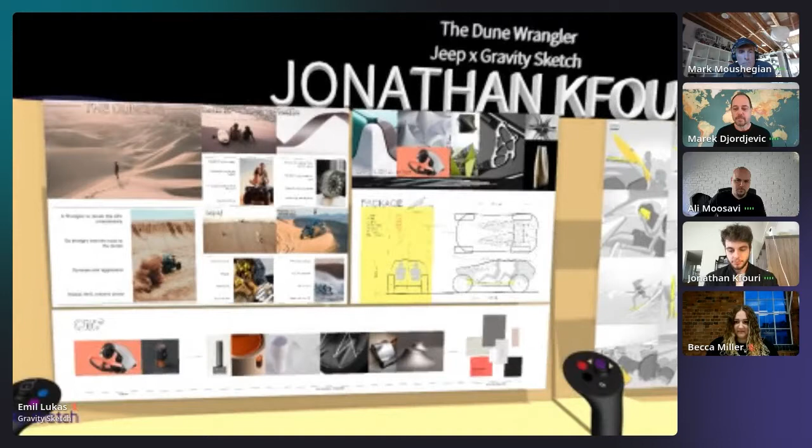One of the materials I've been looking at that's really become core to the project is Braeon, which is essentially a flexible material that's stronger than steel. In terms of my inspiration, I'm looking at inspiration that's both playful and geometric, as well as pure and dynamic, really trying to tie into the duality between both parts of the project.

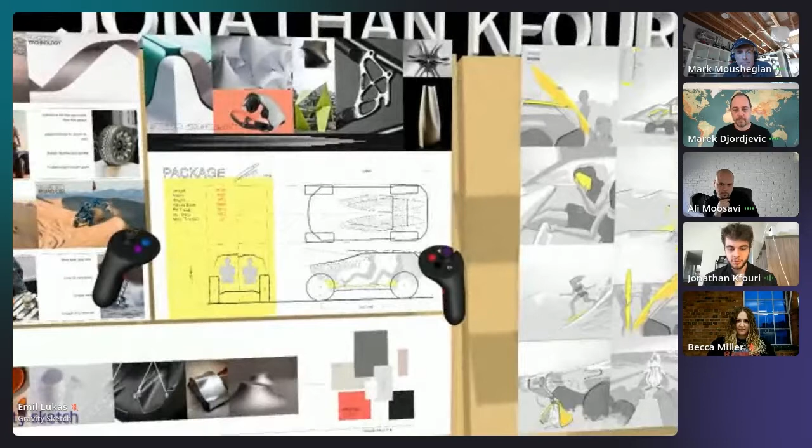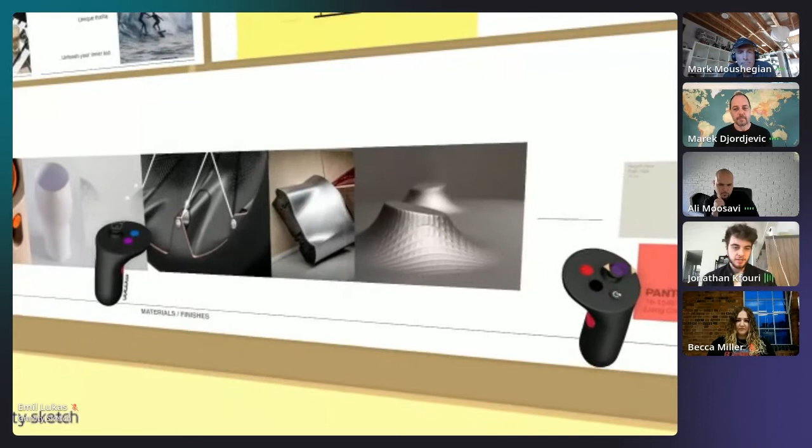For the package, I'm looking at having a low center of gravity, as well as a high polar moment to really make the car handle like a rally car, something perfect for the dunes. In terms of my CMF at the bottom, we have a tactile, more sensory feeling CMF—something that feels both rugged and sophisticated, but also approachable. I really don't want this to feel intimidating in any way.

Moving on to my storyboard, this is really just a day in the life of the user. Next to that, we have my animation rundown for the following animation that we'll see at the end of the project, not of this presentation, unfortunately.

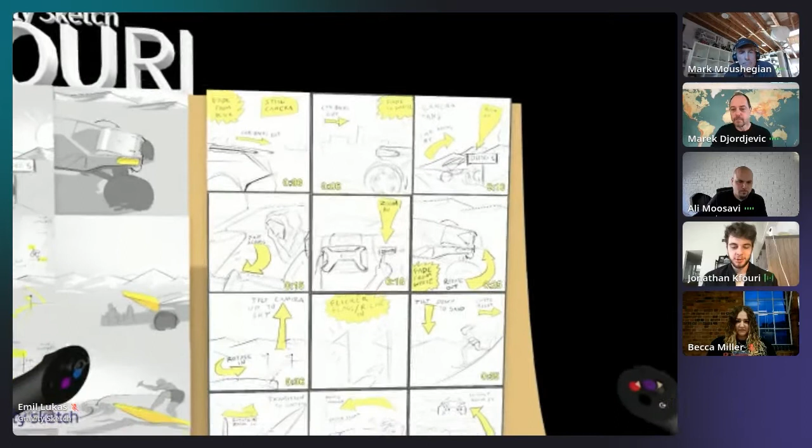This is basically highlighting my user—lives in Florence, Oregon, which, if anyone's ever been, is basically a set of sand dunes along the coast of Oregon. So I imagine a user that's basically utilizing the sand dunes and the beach, running through a quick story using all of that.

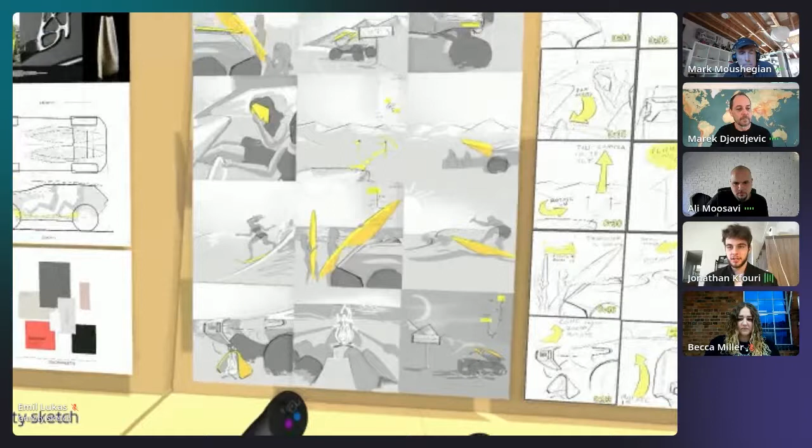Moving on to the 2D sketches—I'll start with 2D, despite the fact that this hasn't been a very linear design process. I'll start in 2D because I think it's easiest.

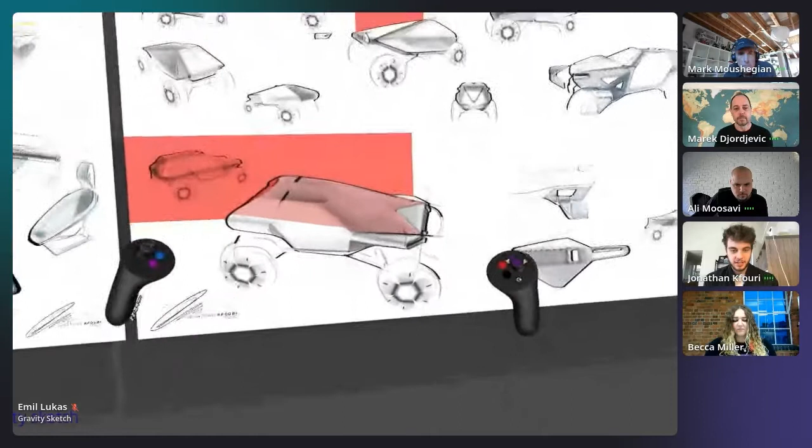This is the key sketch, what Emil's focusing on right now. What Mark and I both liked about this was that it feels like a redefinition of modular design—something that feels a little bit more holistic, but still has that really modular Wrangler approach.

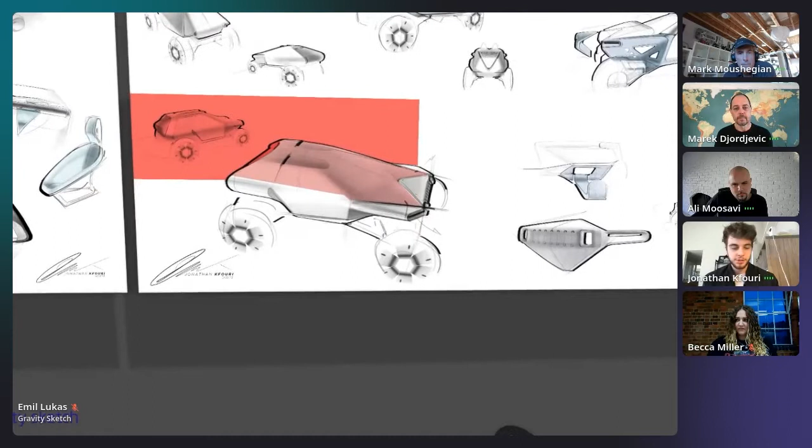If we continue on, you can see the removable grille, as well as some of the frame design, lower control arm design—tying back into power sports. You need to really design everything, so I wanted that to be the case for this vehicle.

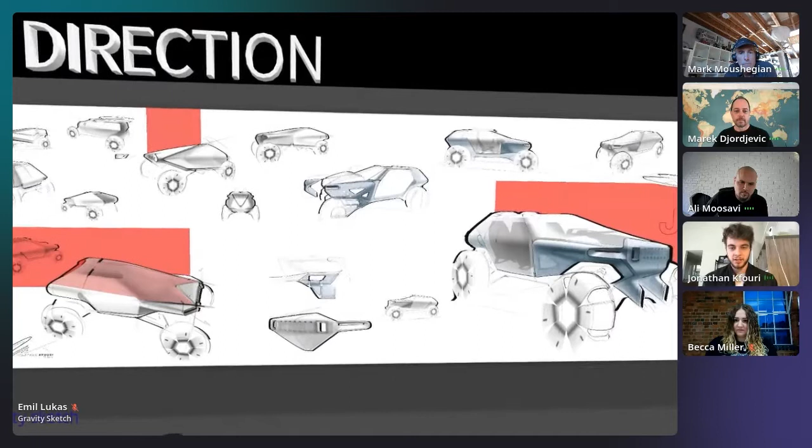You can see here also the foldable glass. This is really a callback to the Wrangler's history—the ability to have the front glass fold forward. Looking into foldable glass technology that we already have access to in smartphones, I wanted to see where we can bring that into the automotive industry. It seems by 2030 that it can be a realistic option, so I think it's a nice futuristic take on something that's iconic for the Wrangler.

And then going on to the key sketch, you can really see that open feel using a big greenhouse. It gives it that feel of, even when the body panels aren't taken off, being in something that's really raw, like a power sports side by side or something.

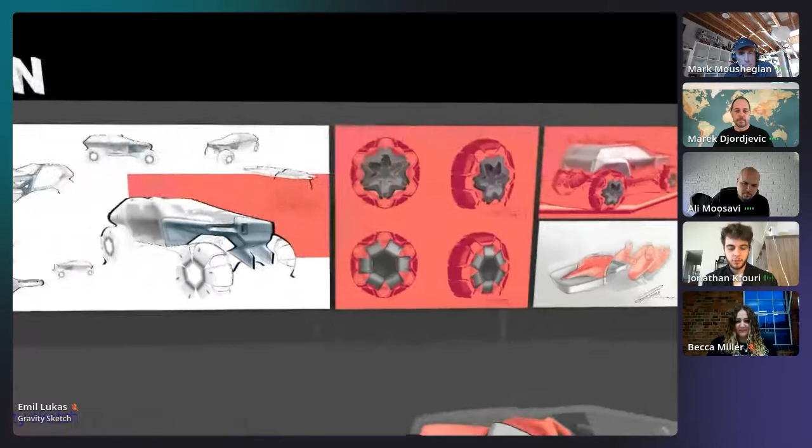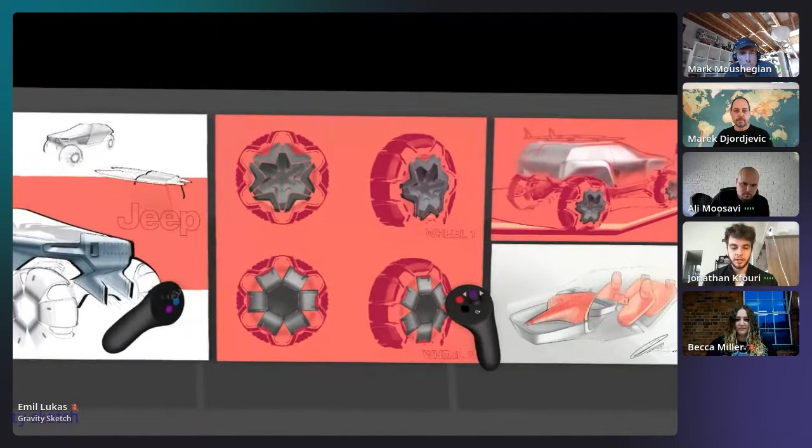Looking at the wheels, these are basically two different wheel sketches, two different wheel directions. I ended up liking the top one best, as Emil's showing right now, just because it feels the most rugged. There's a high level of detail and hierarchy that I think relates better to a rugged vehicle like this. And then we can also see the renders.

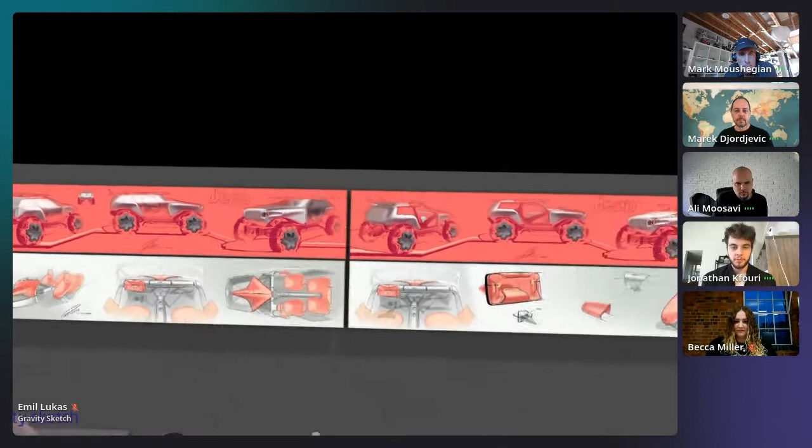One of the things I've really enjoyed with Gravity Sketch is that the renders no longer serve the exact same purpose they do in a traditional project. I've really taken this to mean I can use these to show artistic expression, rather than just highlighting absolutely every transition in a surface to make sure everything's extremely credible. We have the data for that, and honestly it does so in a much better way anyway.

Then we can also see some of the interior, really looking to bring a level of refinement to the frame and roll cage that you would get in a power sports project, bringing a level of beauty into that. And we can also see the vehicle stripped down to the sand dune setting.

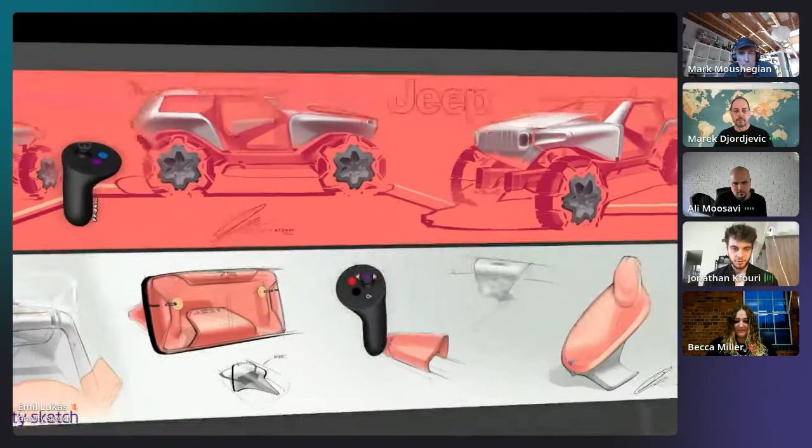You have the door panels taken off, you have that front glass folded down, really bringing a level of rawness to the project, something a little more dynamic than in the street version.

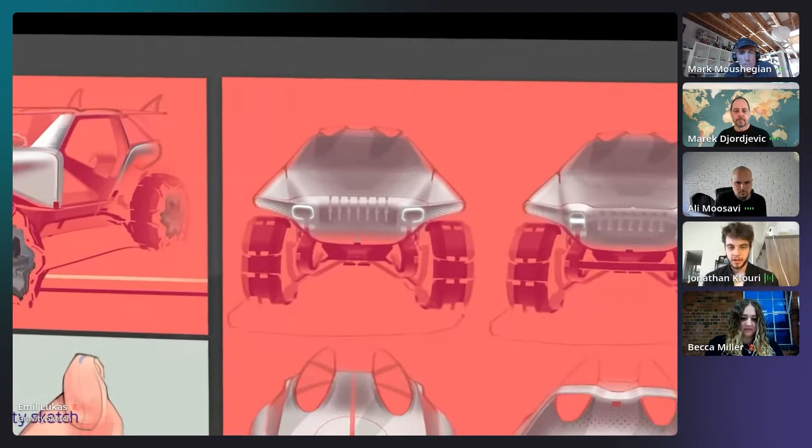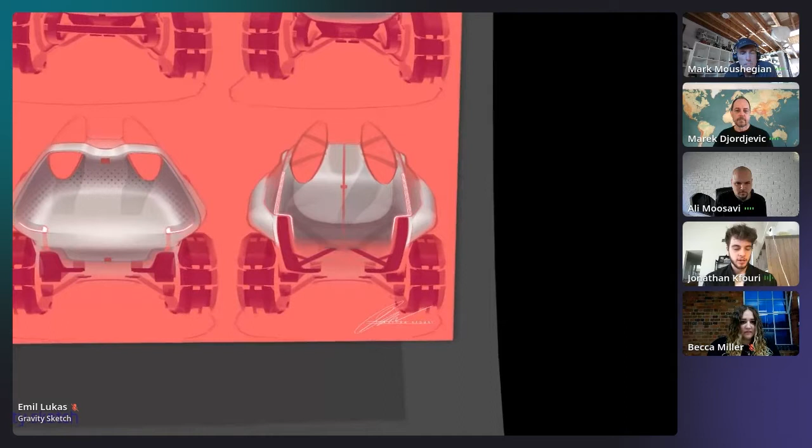And then at the end of this, we can look at the front and rear ideations. These are basically just standard transportation design practice. As you go through a project, you really want to work on honing in the front and rear. At this stage specifically, I was looking to bring a level of harmony into the design compared to earlier weeks, as well as work on bringing a level of width to it. It was looking a little narrow before.

We can see this week too, also before this presentation, I've been working on really trying to make the rear end feel more Jeep-like. Marek and I have been discussing and struggling with the rear end not feeling like a Jeep. So this week was really about trying to bring a level of parallel lines that are pretty characteristic of the Jeep versus what I've been doing in previous weeks.

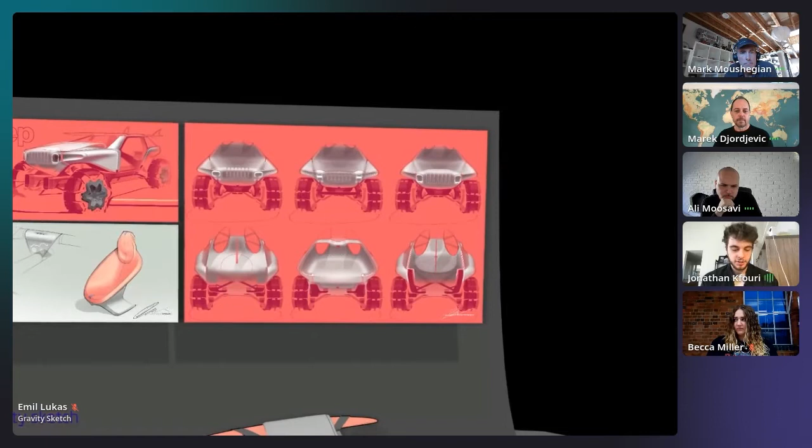And then if we move on to the 3D, we'll look first at the extras. The main point in this area is looking at the front grille. We can see two ideations based off those 2D sketches for the grille. And one of the main points for this vehicle has been using the grille as a grill, as I've been saying, which you can see here.

Given that this is an EV vehicle, the grille really no longer serves a true purpose, so I wanted to give it some sort of redefinition, some new life. I thought I could do that by having it be a grill. So it's a removable item that they can place over the fireplace, and then you can use the 7 grill slots as a place to roast your hot dogs. I figured it'd be a nice way to bring the campsite anywhere you go.

And then you can see, as Emil's showing, these tensioners throughout the design. These strengthening tensioning wires are something I discovered in 3D. I think with Gravity Sketch especially, it's really easy to put some lines into things, and I think it brings a nice level of lightness to the design while still indicating strength and dynamism.

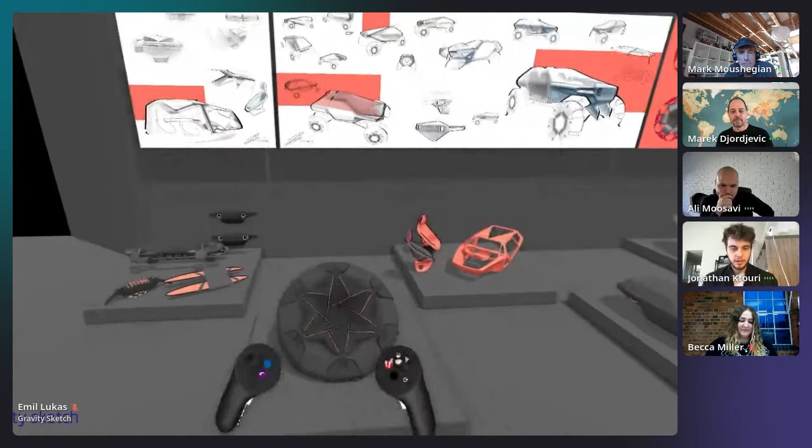And then moving on, we can see the wheel as well. This is the fully detailed version of the wheel.

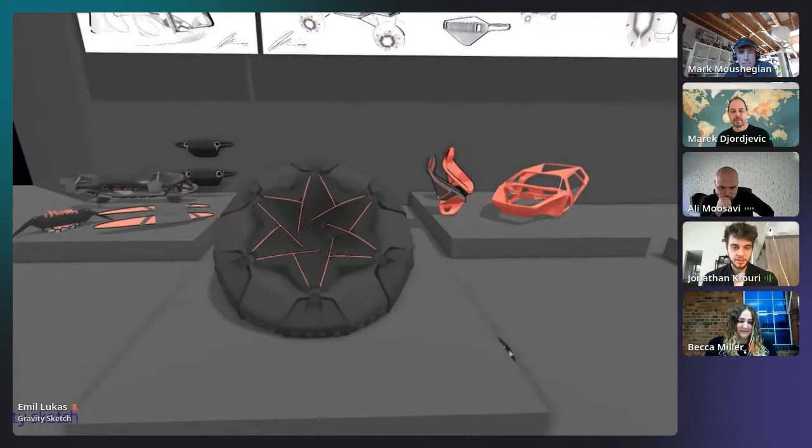And then you can really see all the tread marks and so on. Super quick and easy to do things like this. In Alias, this would take a day probably to make. And in here, it takes at most an hour, if that.

And then we can also see here, looking at the frame and the interior. This is really the first true indication of how nonlinear this process has been. By that, I mean almost all of the interior and framework has been done in Gravity Sketch before I did anything in 2D. A lot of the purpose of Photoshop has been to refine what I've been ideating in Gravity Sketch. So really everything you're seeing here has been refined through various stages of jumping back and forth between Gravity Sketch and Photoshop. But the raw ideas for all of this came from Gravity Sketch, and it's been really good for that, especially with interior, given that everything needs to be usable for a person. It's a really practical tool in that sense.

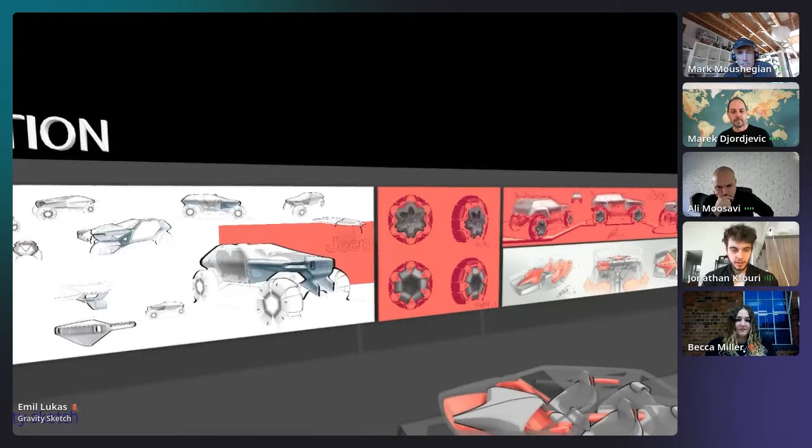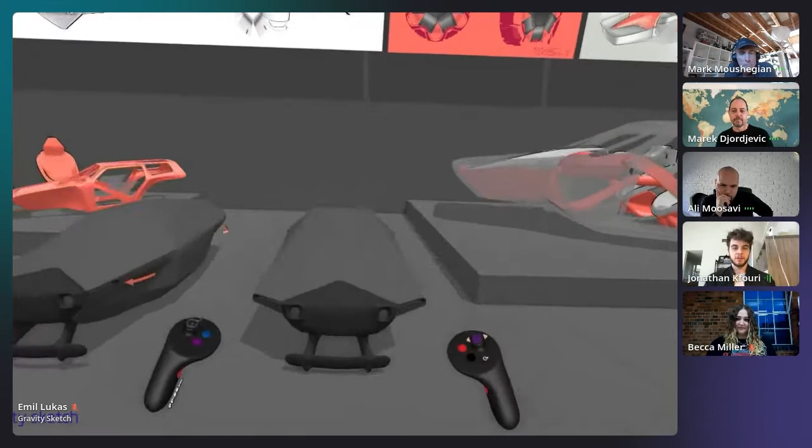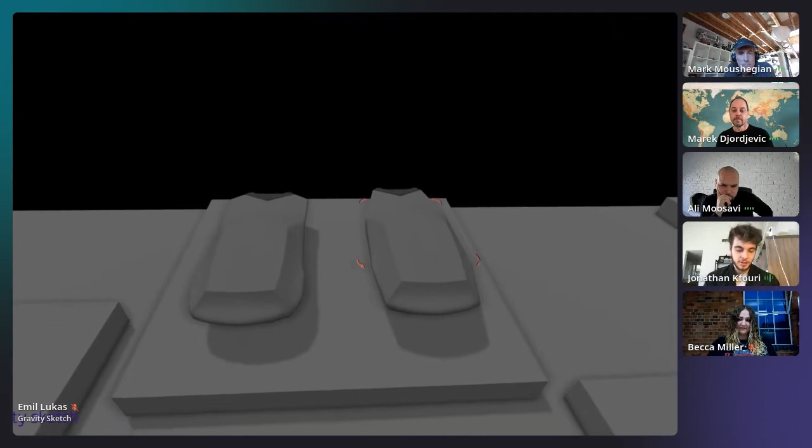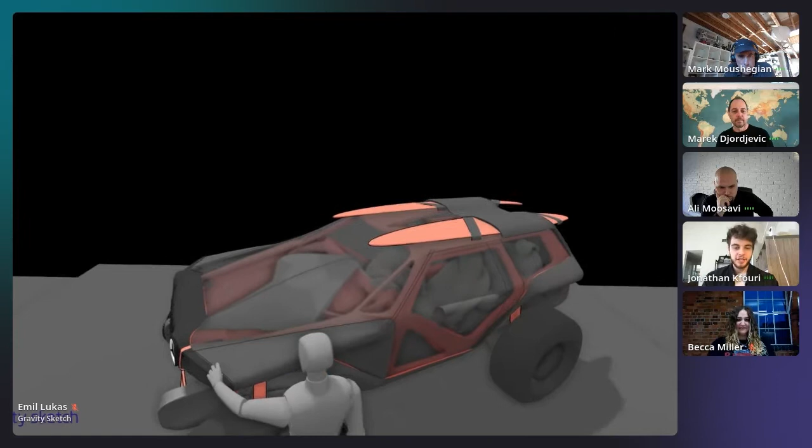And then moving on, we can see, so this is basically full-blown design. This is the closed version of the design, so I guess the street version, if you will. This is trialing one of the front ends. And we can also see throughout everything, I'm always trying different CMF options. CMF, for anyone who doesn't know, is color, material, and finishes. So it's really me just trying a bunch of different setups in terms of colors and graphics and so on.

We can look into the interior, more detailed idea of the steering wheel and so on. All of this is set up in the non-autonomous mode, for the point of just the fun of using sand dunes and going through off-roading and so on, is doing it yourself.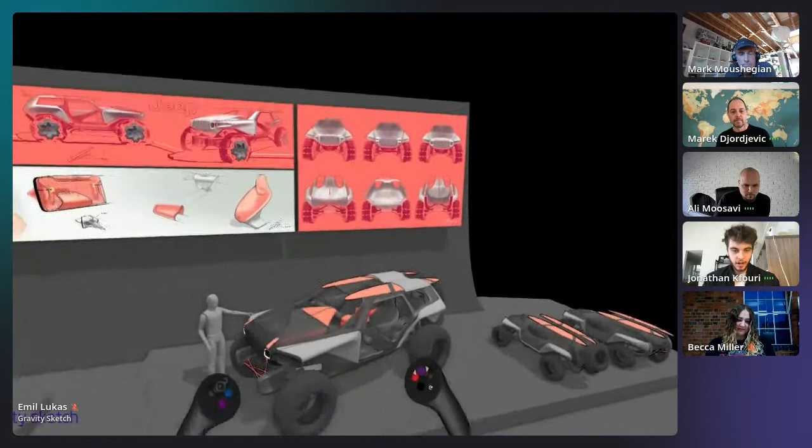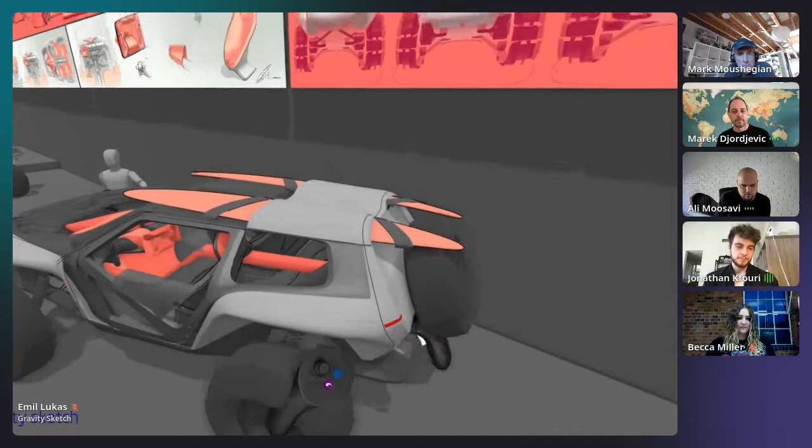And then moving on, we can see really the showpiece for this is the stripped down version for the sand dunes. This is my favorite CMF palette at the moment. We can see that front windshield folded down. We can see the door panels taken off, really utilizing as much detail as I can throughout it, while trying not to make it feel distracting in any way either. It's really been a case of harmonious design, and also bringing that kind of raw feel into a traditional project.

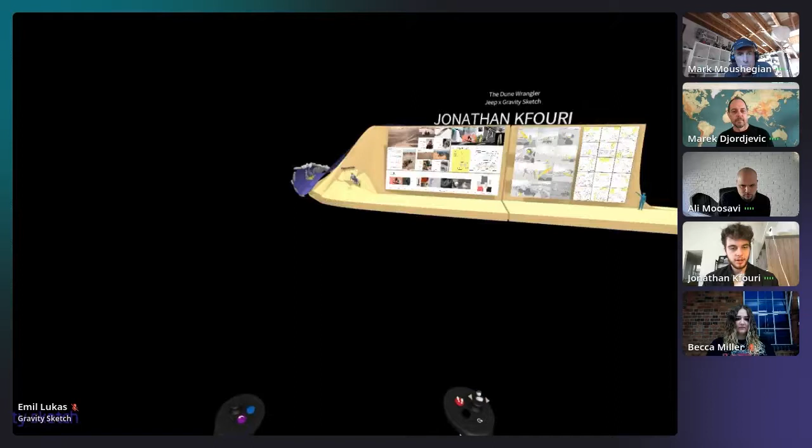And then also at the end of this, we can see some of the new rear end designs I did. This, again, is a great example of utilizing the Gravity Sketch tool. These I did before this presentation yesterday, working through, really trialing these new rear ends that feel more Jeep Wrangler to me. These started basically as just little tiny notebook sketches.

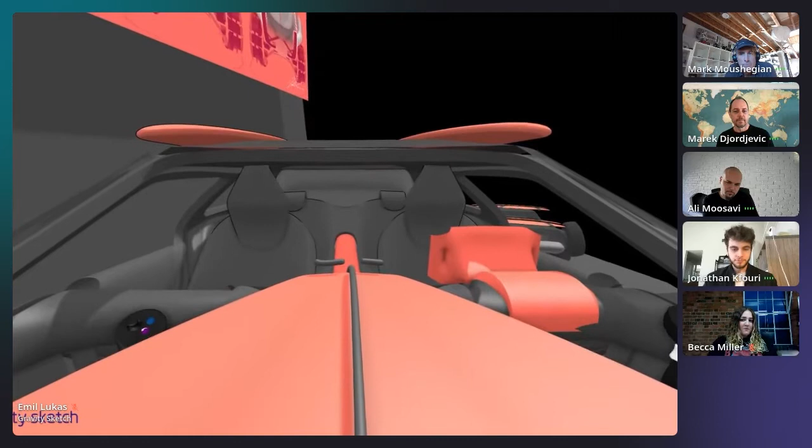And then I was able to just quickly take a photo of those sketches, bring them into Gravity Sketch, and then immediately model out, just to get the rough idea of everything. And then after that, bring this into Photoshop and refine further from that. So sometimes now, in terms of modern designers, we can get accused of what's called reverse engineering, where we focus solely on the 3D model and then make it look like we did it in 2D. But I think with Gravity Sketch, it really just allows you to switch back and forth very easily and come up with what I would consider just a new workflow in general, utilizing the benefits of each and every tool that we have access to. And that's all. Thank you, everyone.

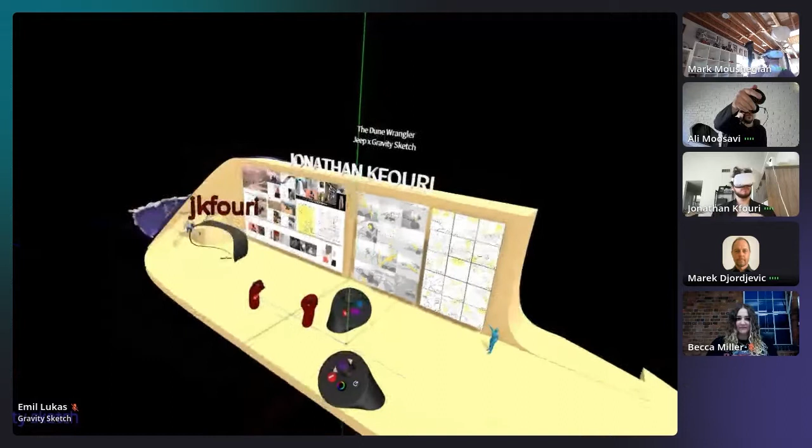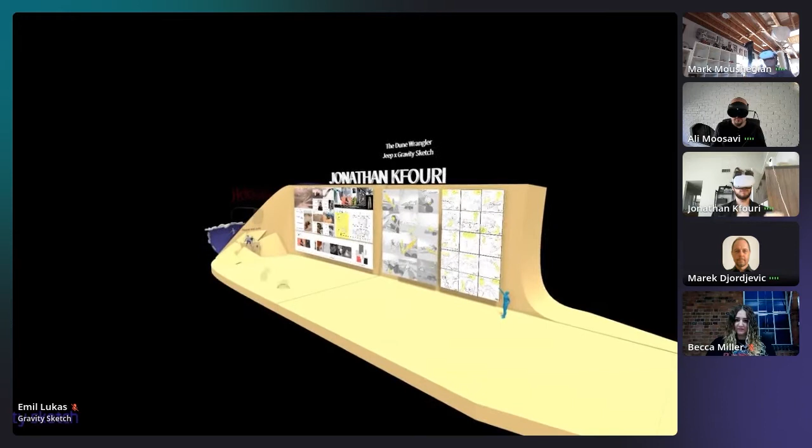Almost there. All right, I'm in. I'm in as well.

Awesome, I guess I'll start if that's okay. Sure, yeah, go for it, Ali.

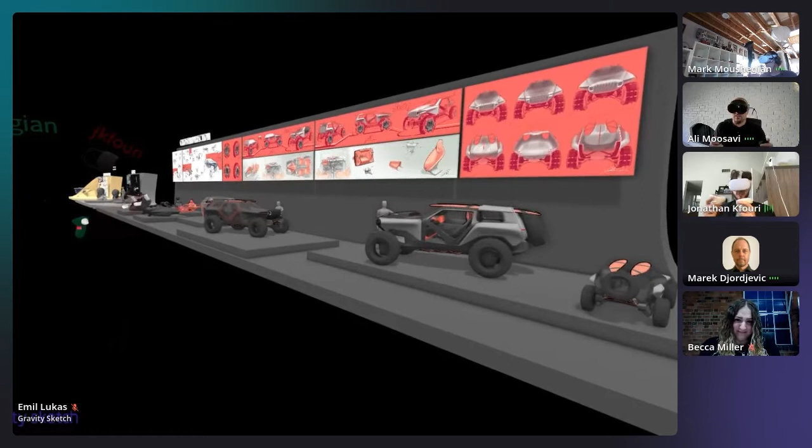First off, I just want to say amazing progress in the short time that you've been using this program and doing this project. Really love this exposed substructure design element that you have here, and you've adapted it so well. The latest rear end iterations are really nice as well. Love the integrated surfboards as well, it really strengthens the concept that this is going to be some kind of beach sand dune crawler.

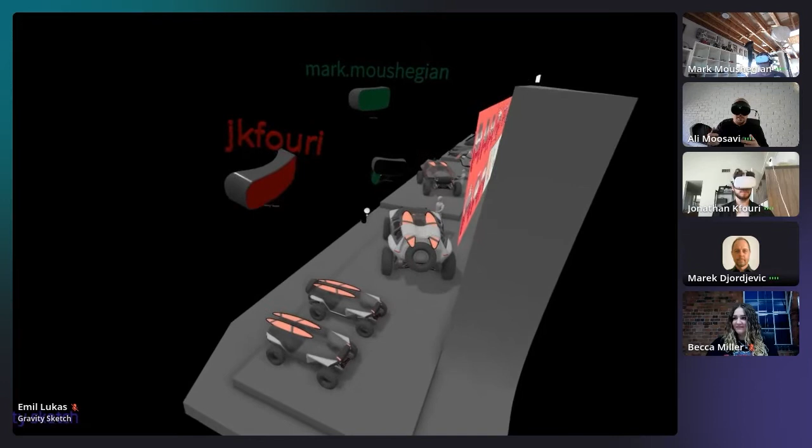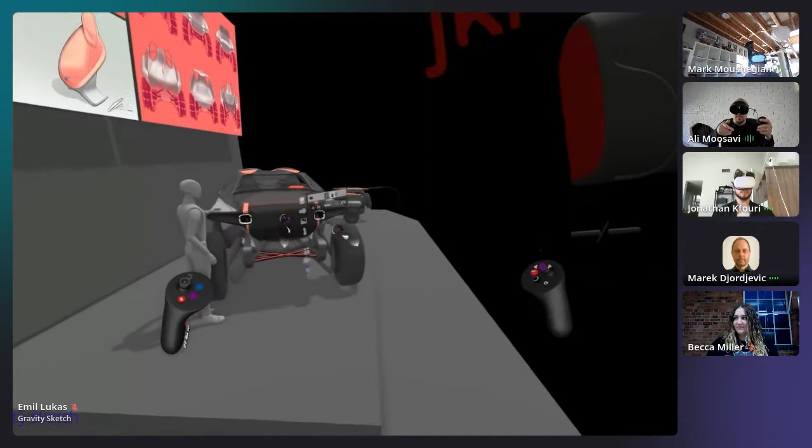Just from a design standpoint, you were talking about gaining width in the vehicle, and I think one thing that could help you in that regard is maybe adding some kind of DRL element here to illuminate the fender form, so that from a distance it's reading wider than it is, because right now the kind of square headlights you have are a little bit too inboard, so it's making it feel narrow.

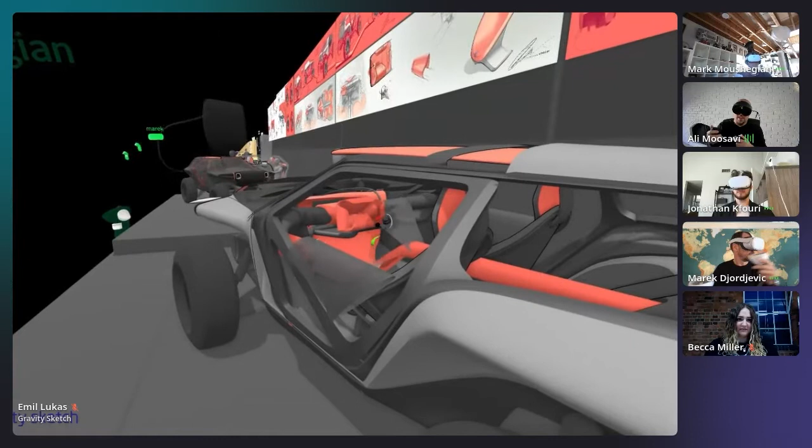But yeah, I really love the interior as well. This kind of origami-esque steering wheel is very interesting, I feel like it would be pretty comfortable to hold. But I'm not sure how well it would handle sand dunes if you're driving a little bit more aggressively. Overall, I'm really impressed with your progress, this is an amazing project. Thank you, thank you so much.

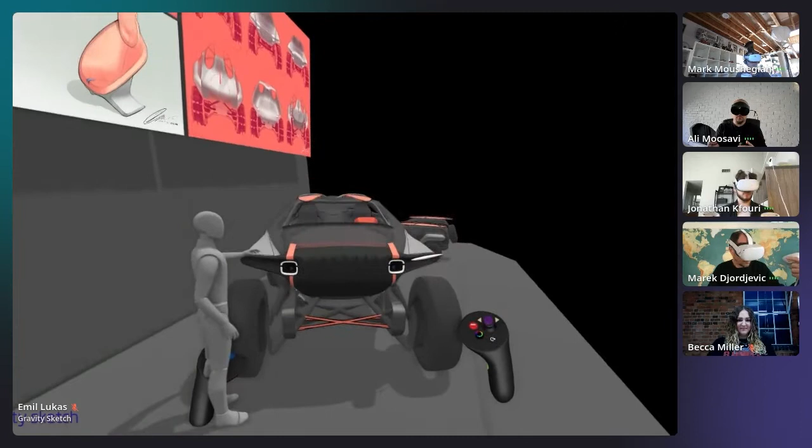Yeah Ali, I'll join in on that, just to echo what Ali's saying. Jonathan, you really embraced this project from the beginning, so we really appreciate your attitude and enthusiasm for it, and this is exactly the type of thing we like to see from students. It's an awesome opportunity to be able to work on an iconic brand such as Jeep. I'm part of the Stellantis team that's fortunate to have that brand to work on as well. Every time I approach projects within the company, it's very much an opportunity to really push the envelope and give the vision for where the future is headed as far as our products.

And I think you're really... Mark, I think we lost you there for a moment. If you wouldn't mind repeating that comment.

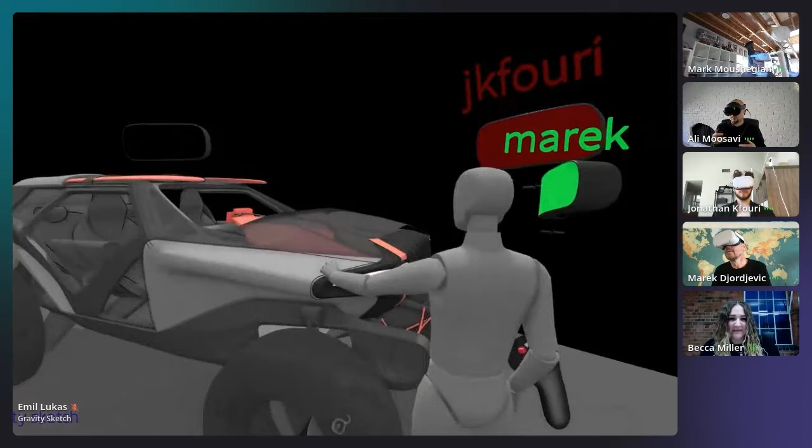Yeah, you're back Mark, if you wouldn't mind repeating the last thing you were saying. My internet's been breaking up, sorry, yeah, my internet has been breaking up, sorry.

Just to give kind of an overview of what Jonathan has done, he's really embraced this, so the design work is outstanding. The ability to sketch and then get into Gravity Sketch and work back and forth, that's exactly what it takes, and it's really good and refreshing to see. I'll give more critique, I'm actually going to be on a session with him later today doing this as well, so I'll give him more input there. But the work is really quite well presented, the design solutions are just right, and the idea of taking the...

I think we might have lost him again. Yeah Marek, do you want to... sure, go? Yeah, I'll jump in, it's probably quite along the lines of... yeah, go ahead Marek. Oh okay, yeah go ahead.

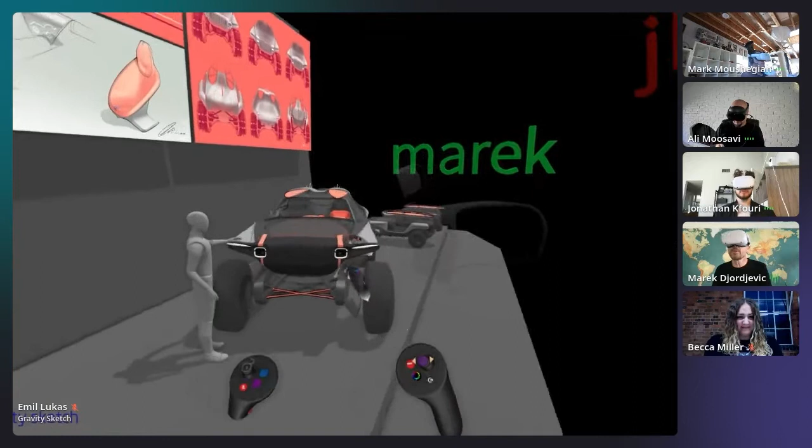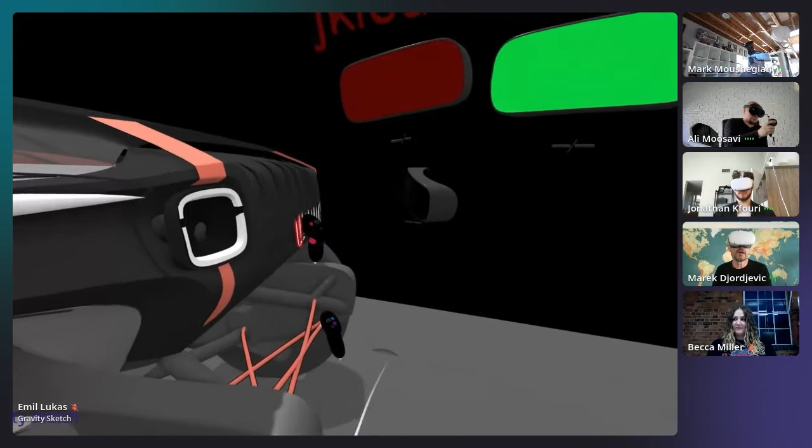So what I really appreciated is that Jonathan was one of the students who really had the courage to take Jeep as a brand and Wrangler as a product into new territories, really more advanced thinking. He also identified this whole idea of sand dunes as an opportunity for a vehicle like this to really enjoy that type of environment, and like Mark said, he really went for it, pursued it. He's also been a terrific student in the class, because in a way he demonstrated some leadership in embracing the tool that we started using from day one. So whether it had to do with setting up a presentation environment that was first in 2D work presentation, all the way into really finding the ways this tool can be used to both design and represent ideas that are formed in 2D first, I really applaud his ability to run with it and create the results that he has.

Thank you very much, Marek. If I can just jump right back in, just for a little bit more critique, I would really love to see you explore a little bit more on the grille itself. It seems kind of in the background of the concept itself. And Mark, you can attest to this, for a Jeep design, you kind of want to play up the grille.

You want to make that a bold statement, as it is a Wrangler, and that's a proud element of the vehicle itself. If you see current trends, where Stellantis is moving, it's more towards an illuminated grille or 7 grille slots, maybe playing with some structural elements that are a little more illuminated, I think would go a long way for the Jeep brand.

Sounds good. Yeah, I had the same feeling looking at one of my classmates' projects this week too. I think there's a lot of inspiration I got from him in terms of the front end and rear end.

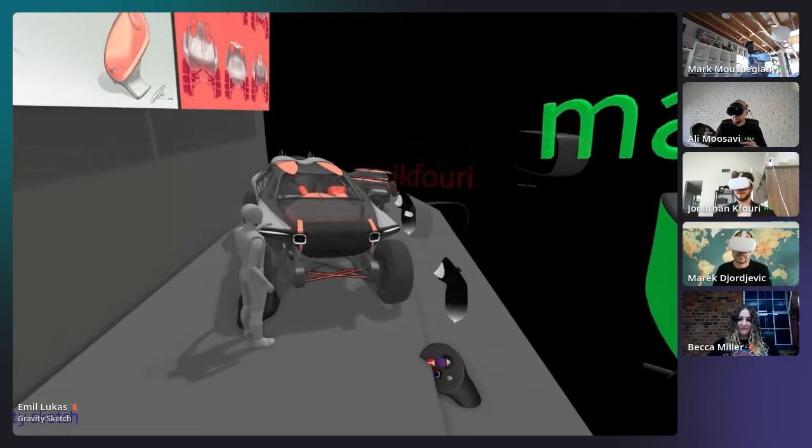Overall, it's really cool. I really like how you made these fender forms here, and how this substructure intersects it. That's an area to explore more.

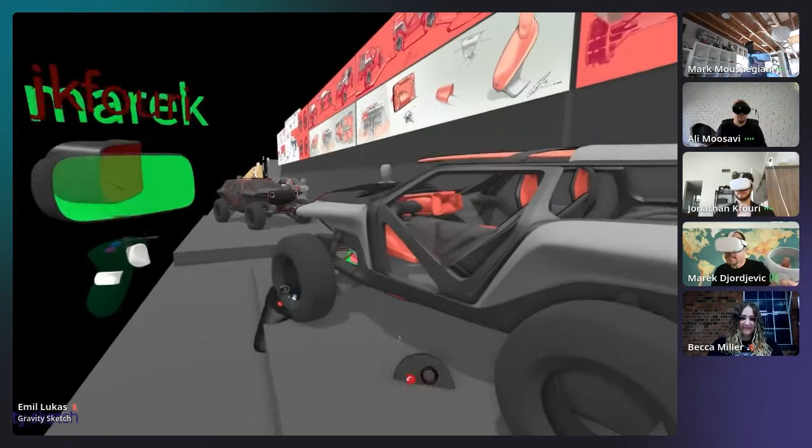I think there's still a little bit of an issue with scale on some of the front end graphics, at least the grille, the headlamps, and so on, in overall relationship to the mass of the vehicle. We'll talk more about that as we finalize the design.

I just want to highlight what you mentioned about you and Mark meeting up. This was another first on this project. A VR tool like Gravity Sketch has enabled a relationship we haven't had before. This time, a sponsor can directly not just interact with or critique, but work in the same space with the designer, and that is really unprecedented. Mark has been very generous with his time, so thank you, Mark, for that. I keep sending students to you, but I hope you don't mind, and they really benefit from that experience very much.

Sure, no problem. Very appreciated, Mark. Thank you very much. Not at all, we enjoy critiquing and giving help and advice. So you bet.

Thanks, everyone. Yeah, I'm sorry, my internet keeps breaking up, so I'm not going to risk saying much more.

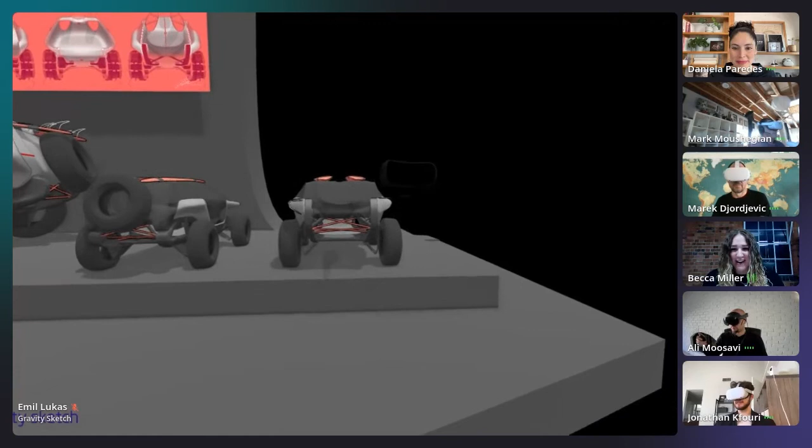No problem, Mark. That was really amazing to see, seeing you all looking at Jonathan's work together. We've just had Daniela jump back in for question time. Thank you so much, everyone, thank you so much, Jonathan.

Really impressive work. You said something really interesting, that you started working in 3D, working in Gravity Sketch. In a way, I almost want to remove the brand names from the conversation, like is it Photoshop, is it Gravity Sketch, is it 3D, is it 2D? It's more around that, because what you're doing here and what this project at ArtCenter is doing is trying to figure out how to push the boundaries in the right way possible. These tools are new, this way of working and expressing ourselves as designers is very, very new, so sometimes we don't even know how to go about it. You said something really interesting, that you started in 3D and then went to 2D, that's usually not the path we see, so it would be really interesting to hear a little more about that.

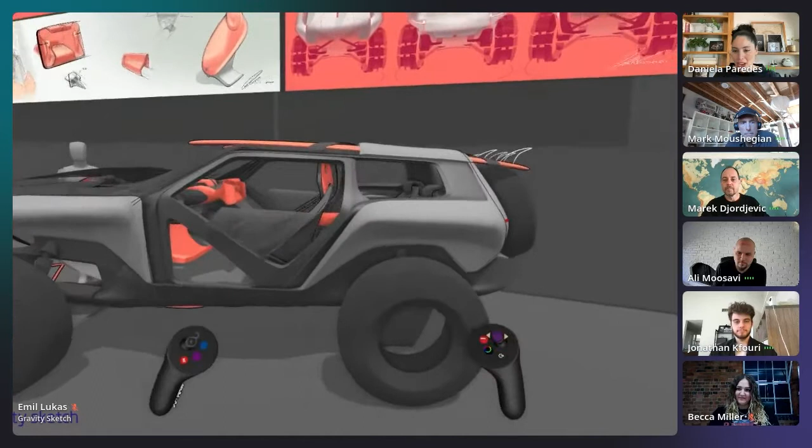There's also a question in the audience about this, like how was jumping from one to the other? What were the kinds of things you were actually doing to do that?

I found it to be extremely useful in that sense. Maybe I have the advantage of having always liked working in 3D, I generally hop into it sooner than other people. Especially for the interior, it's been amazing, because an interior is meant to be designed around a human being, it really allows you to sit in an interior and map things out. I think it allows you to make things in a way you wouldn't think to make them in 2D. There's always restrictions with how you think in each setting, just like there are restrictions working in 3D.

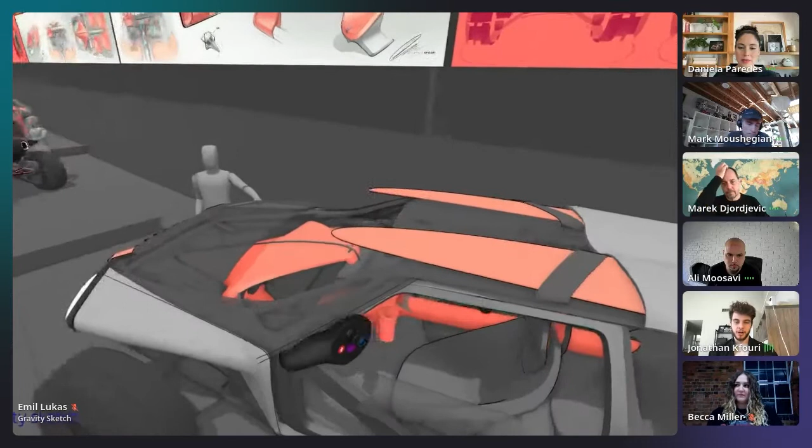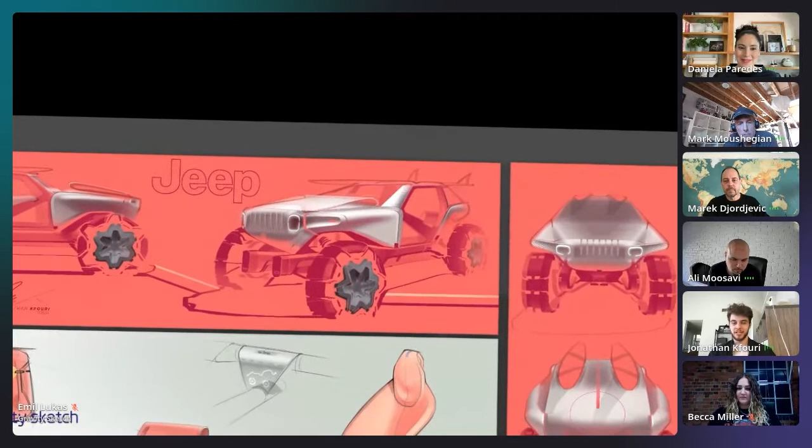So I'd encourage anyone using this tool to design to try both ways. There was a week where, with the exteriors as well, I tried doing those in 3D first, really just form exploration, kind of unrefined and pretty messy, but then bringing that into 2D based off of those and using them as inspiration, I guess. So there's tons of different uses for being able to go 3D first or 2D first.

It sounds like you were experimenting and experiencing the actual vehicle, so it's not even about 3D. Yeah, that's a good way to work.

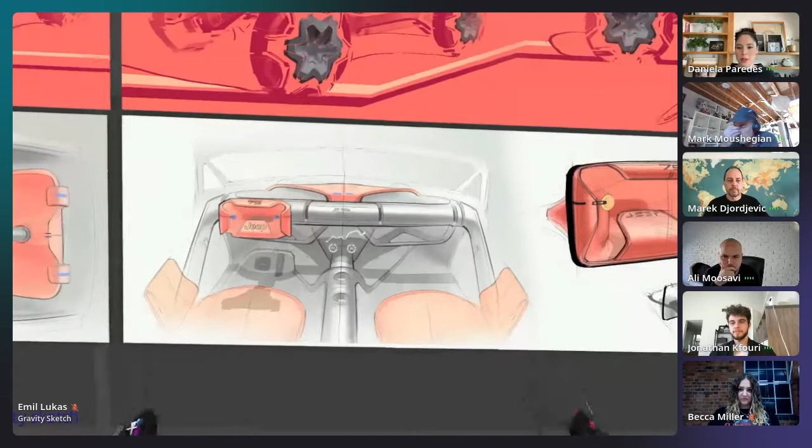Sorry guys, I'll just pipe in. Go for it, Mark, you're back.

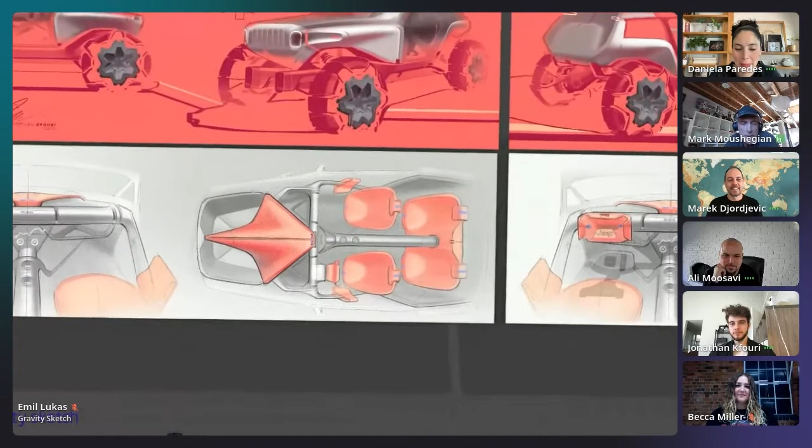Jonathan's ability to work in 3D and sketch and go back and forth is really encouraging, because that's how I work, and I'm very familiar with that process.

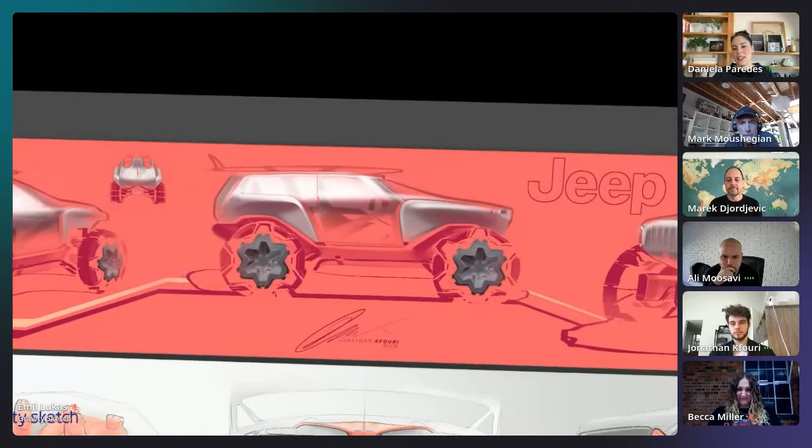Marek, are you seeing different... did you guys hear me? Did I break up again? No, we did hear you, Mark. Thanks. Marek, are you seeing different results with the students now that they're working?

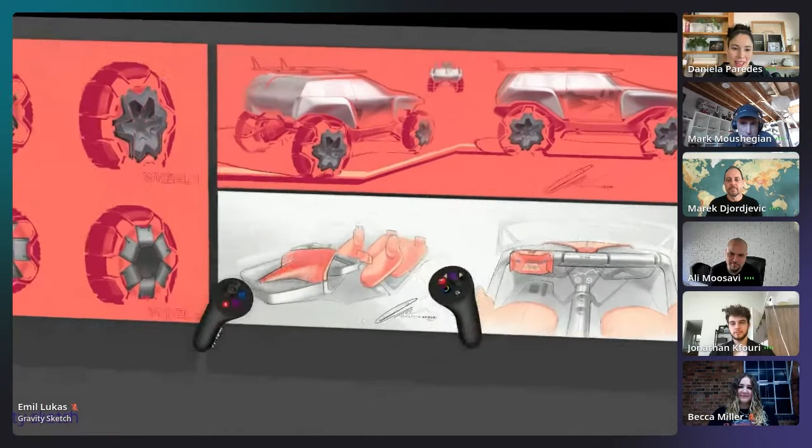I almost don't want to say in 3D, because 3D has a very specific meaning - like it's the internet, like in a computer screen. Have you seen different results with students working spatially and having these collaborations in this virtual environment versus other projects?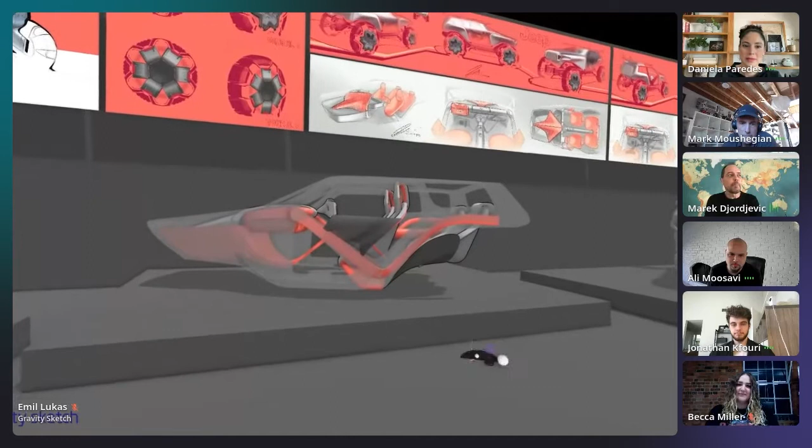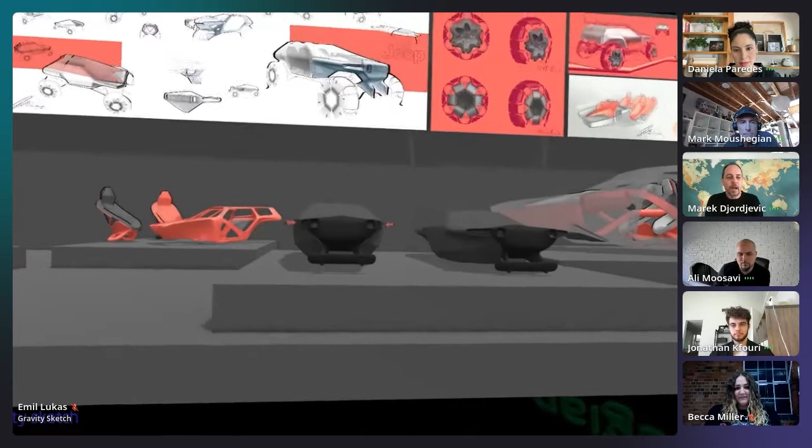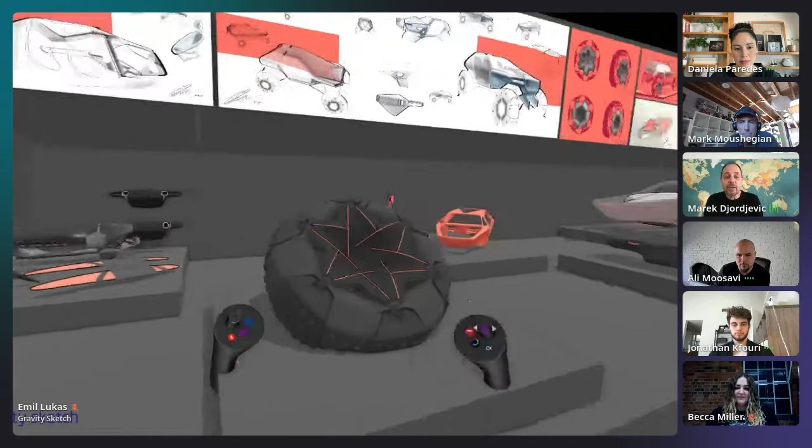Yes. What I find interesting is that with every tool, whether physical or digital, every tool brings something of its own to the table. It can influence a design in a certain way, just in how you think about using it. An interesting thing about Gravity Sketch is that because of its multiple functions and uses in the process, it's a great tool for presenting, as we're seeing today. It's a great tool for collaboration, and it's a great tool for both modeling and creating. So there's a difference there, right?

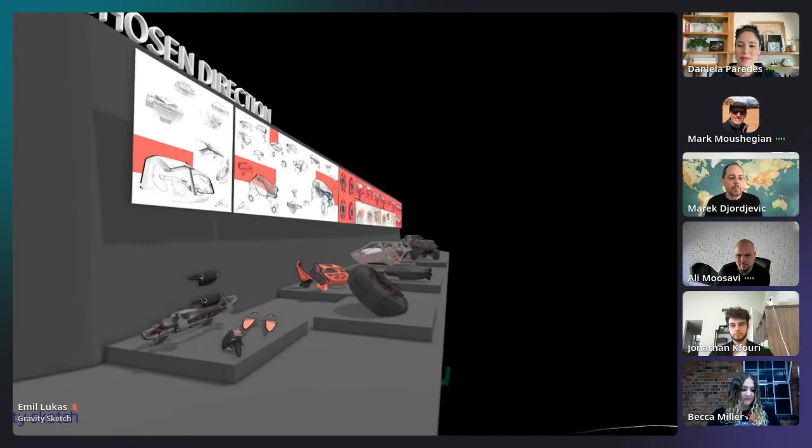You might have a premeditated idea, or you might just get in there. And I think that's why it's so aptly named Gravity Sketch, because there's something about sketching that is a mix of premeditated and in-the-flow creativity. The cool thing is that Gravity Sketch is not restricted to one or the other, but it actually allows you to do both.

It's also a great tool to bring in an already completely premeditated 2D design, setting up the planes of the 2D images in all the views and then using them as reference to construct - that's also a great way of using the tool. But like Jonathan mentioned, I think one of the very important things has to do with sense of space when it comes to the interior.

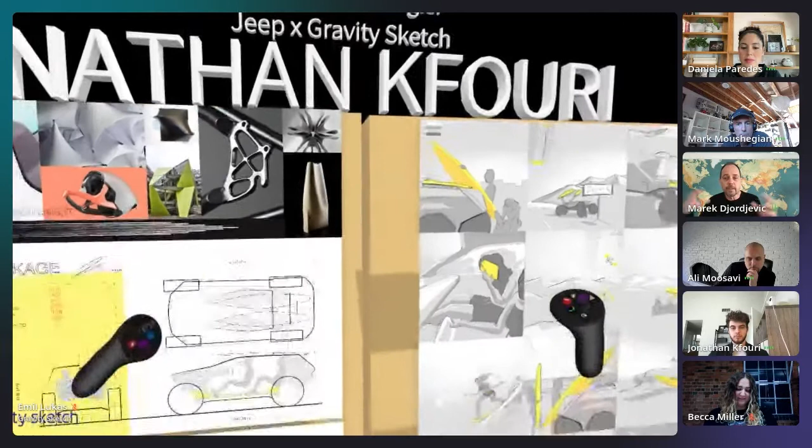I would also say sense of scale, which is very often under-considered in exterior design too. Students or even professionals will design a vehicle that without a context of scale may be correct or wrong, inappropriate or in error in the very scale of the design. So I think that's another aspect where Gravity Sketch is so helpful.

There's a question from the audience. Mark and Jonathan, how much time do you spend critiquing together versus Jonathan working on his own?

Hugely disproportionate. It's usually about 15-20 minutes of critique in class, and then I can do things like reach out to Mark - I assume that'll be maybe an hour or two long session today. But generally with any project we do, we're spending something like 30 hours a week on it, probably 20 to 30 hours if not more. In terms of our own work, you don't need to critique as long as you need to work, I guess.

What will be used to animate this end project?

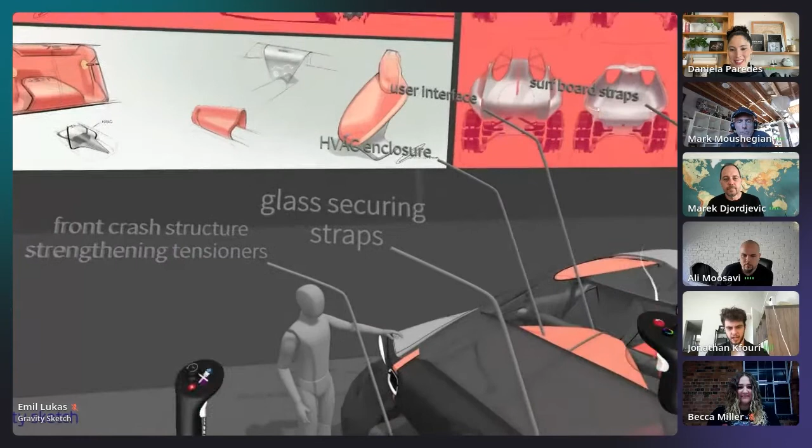We're figuring that out now. Marek leaves it pretty much up to us. The two main candidates are going to be between Twinmotion and Blender, just because they both offer really useful aspects in terms of human animation. And this project, because we need to tell so much of a story with it, needs a lot of human character animation, which you can't really accomplish in something like Keyshot as easily.

Are the props for the scene done in Gravity Sketch or imported OBJ files? Everything has been done in Gravity Sketch so far, all of the detail work. To me it's actually been a little bit difficult in that sense, personally, because I'm a big Alias fan and I've really tried to challenge myself to not just rely on other 3D programs. There are a lot of advantages to working in Gravity Sketch that I've found from the design aspect, so I've been trying my best to stay away from anything else, but it is possible. I've seen other kids in the class do it, and it's worked pretty effectively.

All right, well those were most of the questions from the audience. There's one for you, Becca: how do people get involved with the education program?

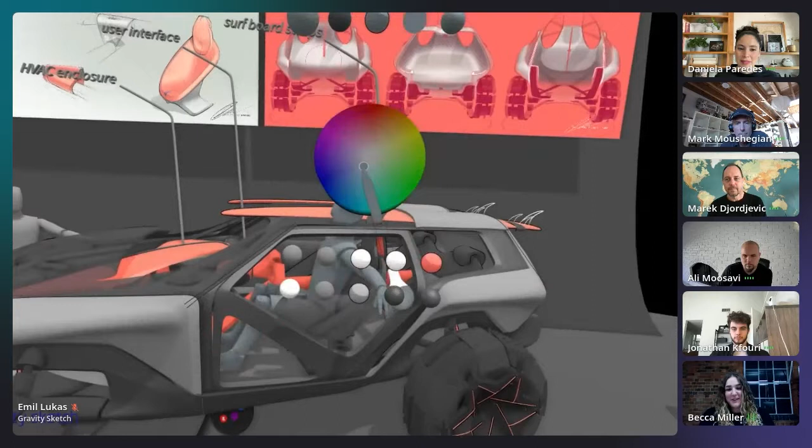Great question. So anyone interested in being part of the education program, go onto the Gravity Sketch website, go to the education page, and we've got a get in touch form. We've got a great team here that puts together lots of resources to help students and professors utilize GS in the classroom. I'd also recommend following our Instagram page, Gravity Sketch EDU, where we run competitions for students and show lots of student work.

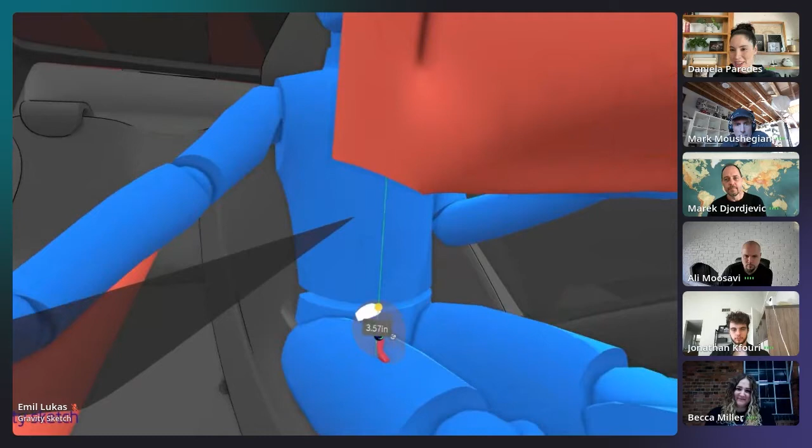Great, thanks. And I'm loving how Emil is just showing how to put the mannequin in there and test a few things out.

I would just jump in on that. The use of mannequins and the ease of using them in Gravity Sketch has also been really great for storytelling, in both concept communication and presentation. It's another great tool in the toolbox that comes with the ability to inject your presentation with a sense of humor as well, which goes a long way.

Yeah, it's a really good point. And that gives me one last question for all of you. This new way of working and expressing ideas is in a way piggybacking on some of the terminology we've been using for a really long time for 2D. Sometimes we try not to say it is a sketch, because a sketch is sometimes synonymous with a perspective drawing on a flat surface. So how would you actually describe this? How would you call this sort of work? Is this a sketch for you? Is this a 3D model? Is this kind of a concept? Like yesterday, New Balance was talking about calling it concept models as opposed to finished models. But there's a whole conversation going on—we don't even know how to call these things because it's a mix of everything.

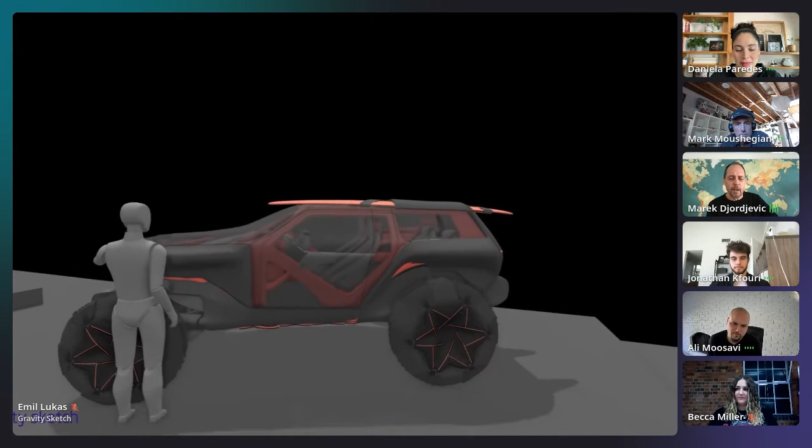Go for it Marek. No, I was just going to say, please add yours too, Jonathan. But to me, what's also super exciting about this tool is it's constantly evolving, and the sophistication is growing. So a Gravity Sketch used from a couple of years ago is a very different experience to what we have today. The ability to create more sophisticated surfacing and detailing has been escalating. So whatever terminology anybody comes up with, I'm sure will be evolving very quickly as the tool develops.

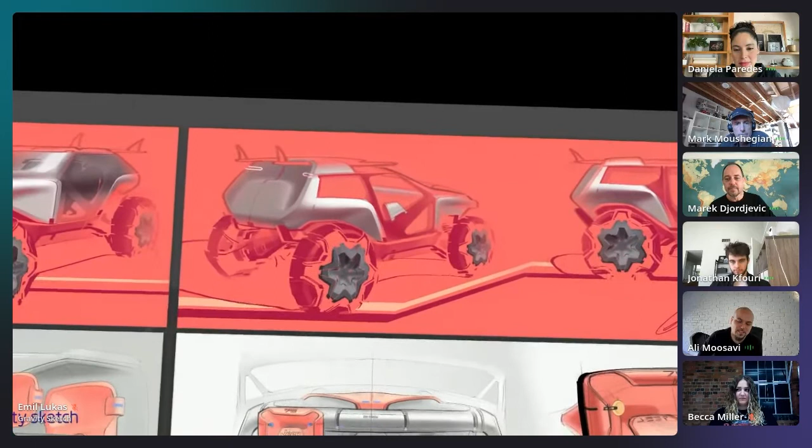Yeah, and the beauty of the program is that it's so flexible. As Daniela was just saying, it's a mix of everything. You can go into Gravity Sketch wanting to do a sketch, and whip out a sketch. If you want to do a model, you could do a model. If you want to storyboard, you could storyboard. That's the beauty of the program—it's so flexible, and you can use it in different workflows across multiple industries.

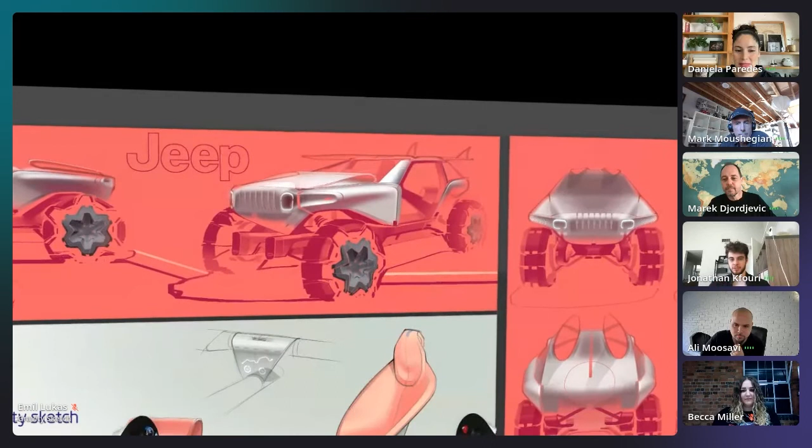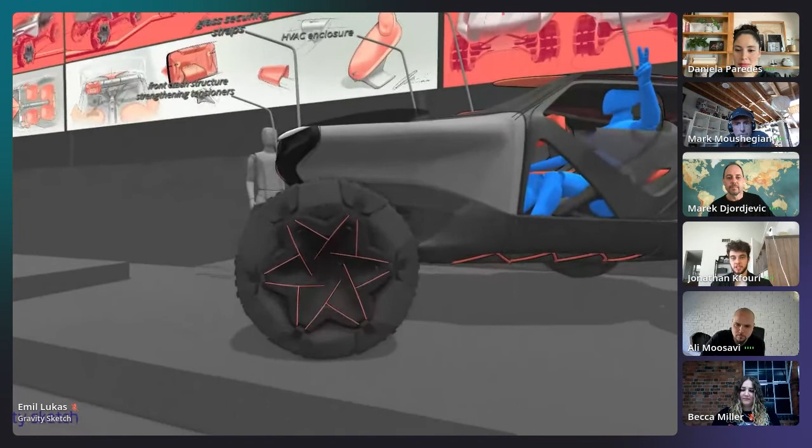Yeah, I think there's a great duality to the tool, and it just has so many options. I'd commend you guys on this—it doesn't try to be the best in any one thing, and therefore it allows it to be really versatile, kind of the best in its own right in terms of versatility. You look at something like Alias, which is the best for surface quality, but it's such a difficult program to use, with a lot that has to be learned about it. But Gravity Sketch is so intuitive, so easy to come up with ideas, but also has a level of sub-D surface quality that can be quite competitive and pretty good. So it really approaches a broad range of the design process, which is cool.